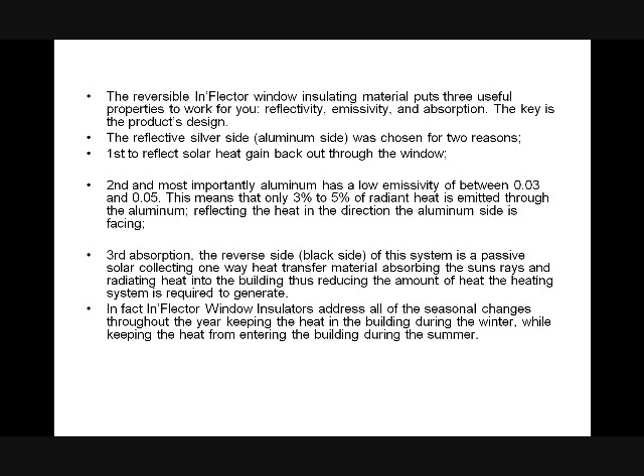It absorbs the sun rays. According to a Texas A&M study, which Dennis is going to explain exactly what a solar loader is, it brings free heat into your home. It doesn't block the heat like window film does—it brings the free heat in. In fact, the In'Flector window insulators address all the seasonal changes throughout the year, keeping the heat in the building during winter while keeping heat from entering the building during summer.

How the In'Flector window barrier insulator works: it is a radiant heat barrier, a see-through radiant heat barrier. Number one, it blocks the radiant heat. Number two, it reflects the solar heat.

In summer, the In'Flector radiant barrier insulators are positioned so the reflective surface faces out, and this rejects 72% of the radiant heat, reflecting the solar gain heat back out through the window. It stops 92% of the damaging UV rays, controls glare, provides daytime privacy, provides cool daylighting with a view, and reduces the load on your AC, therefore extending its life.

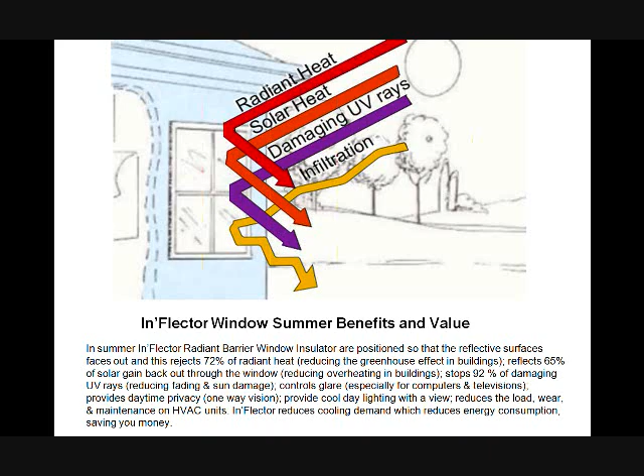And the most important part is it's saving you money. That's what I like best about this product. Not only does it make you comfortable, but it saves you money, and you're saving the earth by it.

Now, heat reflected from a window type after In'Flector window installation: for a single pane window, the percentage of heat coming through is 85%. By installing In'Flector, you decrease it to 17%, an incoming heat reduction of 80%.

For a double pane clear window, the percentage of heat coming through the window is 70%. Decreased by installing In'Flector to 15%, that's a heat reduction of 78.8%.

That is amazing. For a double pane low-E window, the percentage of heat coming through the window is 54%, decreased by installing In'Flector down to 13%—an incoming heat reduction of 75.9%. Now that is what I call a comfort zone, keeping that heat out. That is a true comfort zone.

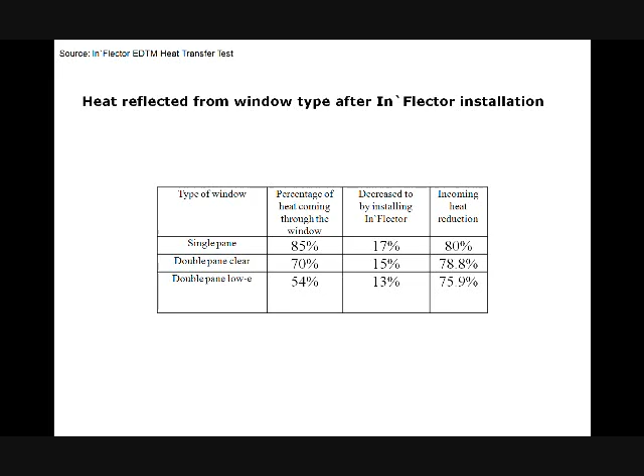So, In'Flector winter benefits and values: in winter, the In'Flector window insulators are reversed so that the silver side faces inward. In this mode, the insulators reflect the thermal heat back into the building, reducing heat loss. Therefore, it magnifies that heat significantly.

It is a passive solar collector—a solar collector, solar rejector. During the summer, it rejects the heat; during the winter, it collects the heat. It's a solar loader—it brings that heat.

According to Texas A&M, by magnifying that heat on a 4x4 window, direct sunlight can produce 2,096 BTUs of heat per hour, which is equivalent to a 600-watt electrical heater, according to the University of Texas A&M.

The damaging UV rays are reflected back outside, and the In'Flector air barrier reduces heated air loss through exfiltration. Again, this reduces the load, wear, and maintenance on HVAC, extending the life of your AC, reducing heating requirements, reducing your costs, and saving you money.

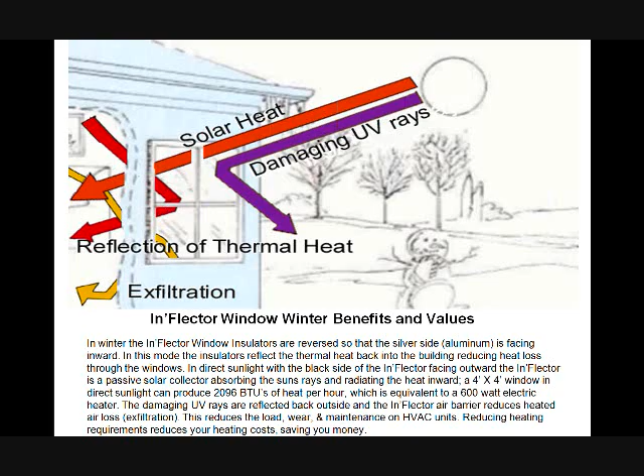If cold is the issue, not only does In'Flector reflect the heat back into the building or magnify the heat, but it also has solar loading absorption and one-way heat transfer.

Heat absorption of plain glass is 6%. Heat absorption of the black side of In'Flector increases to 51%. That's an increase in heat absorption of 750% in relation to plain glass versus In'Flector. I know that to increase comfort in my home, I would want that 750% coming in, not just the 6% that a plain glass window provides.

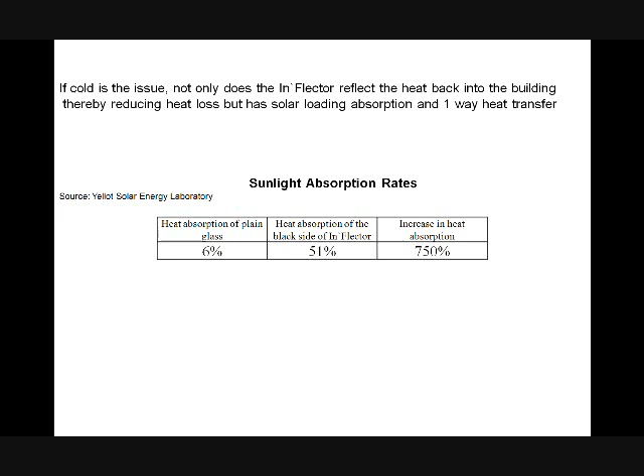In fact, In'Flector window insulators address all the seasonal changes throughout the year, keeping the heat in the building during winter while keeping the heat from entering the building during summer.

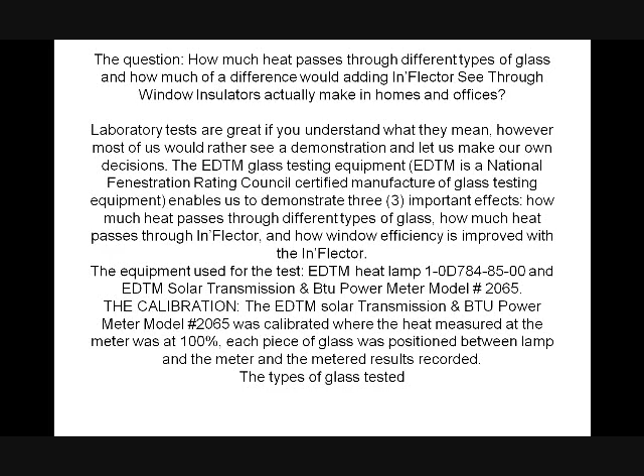So now let's get into the science about some of the things that Keith brought out. Real quickly, we're going to go through an EDTM glass test kit. EDTM makes glass test equipment for the National Fenestration Rating Council, which is the primary body in the world for rating glass products and how they work. What we're going to do is use an EDTM heat lamp, and an EDTM solar transmission BTU power meter to find out how much heat is coming through glass. We're going to take the three primary types of glass: your single pane, your double pane, and your low E.

First, we're going to put the heat lamp on. We're going to calibrate the heat meter, the solar transmission BTU meter, where it's reflective of 100% of the heat from the sun hitting the meter. Then we're going to put the different types of glass in between there.

What we see is that the single pane piece of glass still allows 85% of the heat to pass both ways through the glass. Heat goes to cold, so the heat is coming in during the summer, and going out during the winter. So 85% of that heat can pass through a single pane window. With a double pane, it's 70% of the heat that can pass through, and with a low E window, 61%. People are really amazed to find out that with your low E glass, double pane, you're still having 61% of the heat passing through in either direction. It's not very good insulation.

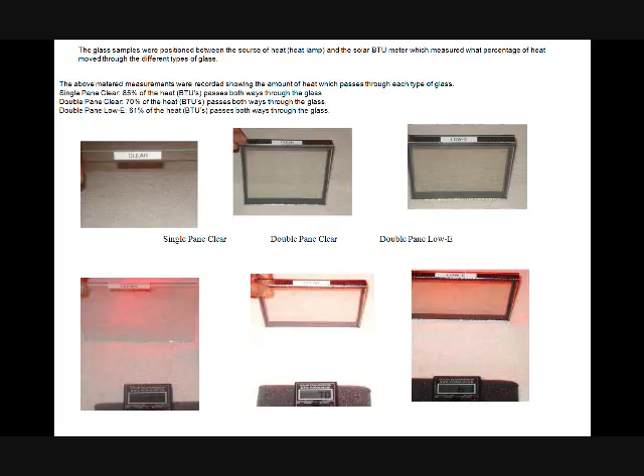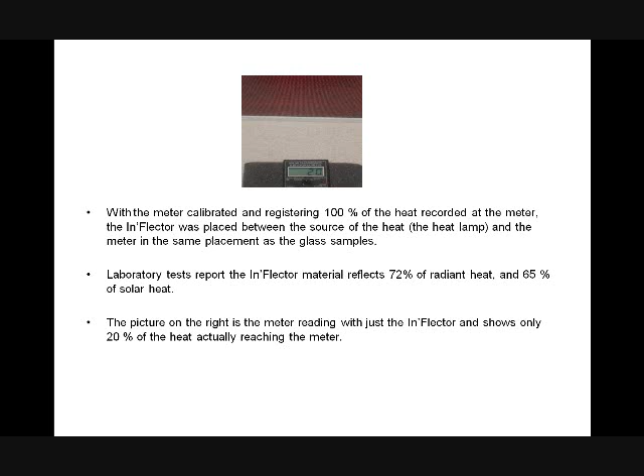Now we put the In'Flector there. In'Flector works with glass, but all by itself, In'Flector reduces that number by 80%. Only 20% of the heat is passing through. But again, In'Flector works with glass, so we're going to see how In'Flector works with the three glass types.

With a single pane piece of glass plus In'Flector, you're dropping down from 85% of the heat passing through to only 17% passing through. The better the window, the lower the amount of heat that passes through. With your double pane piece of glass, it goes from 70% passing through to only 15% passing through. With your double pane low E, it's going from 61% of the heat passing to only 13% passing. So the percentages are going down, and the actual net heat is being reduced because you have better windows.

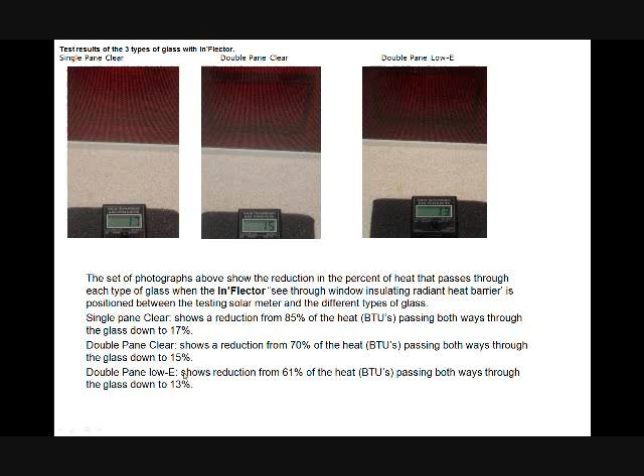So what you clearly see is that with any windows, you're substantially improving the performance by adding your In'Flector window insulators. Let's look at that graphically real quick.

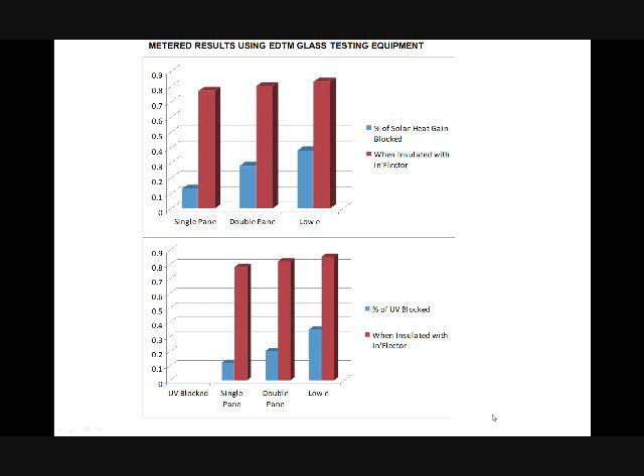This is a little video showing a freezer door. What we've done is we've taken the freezer door out. We've got a piece of glass there, and we've got an In'Flector.

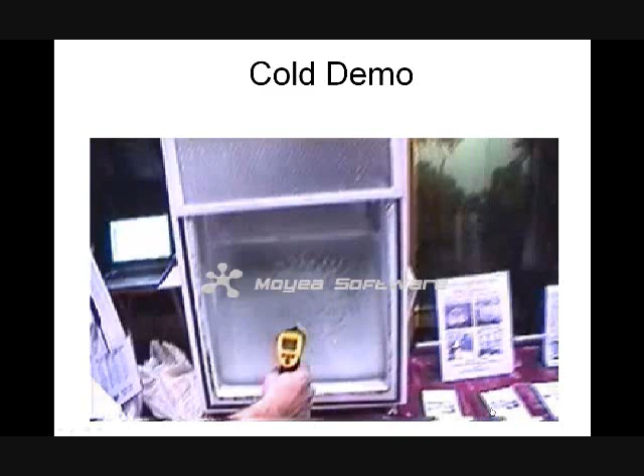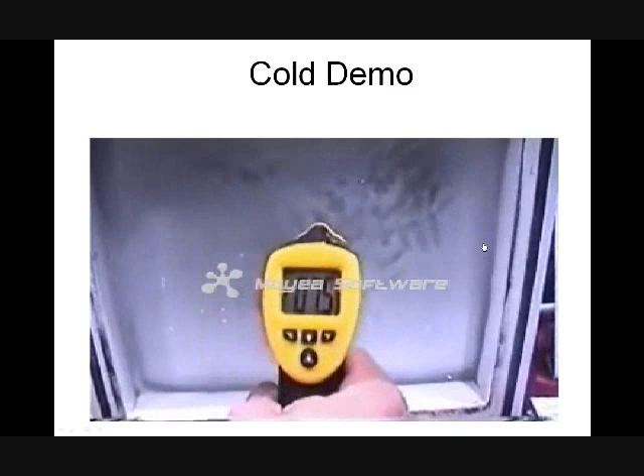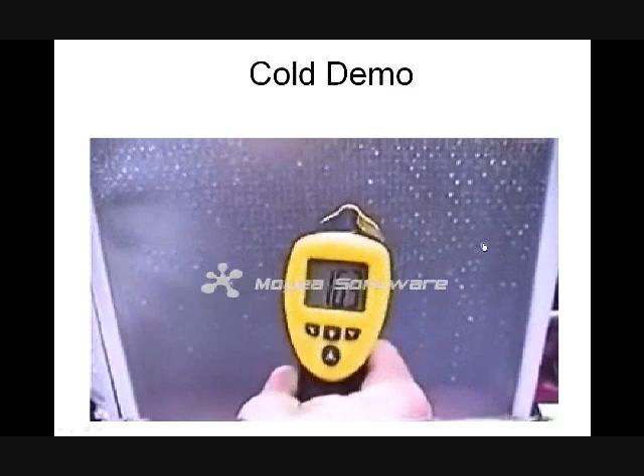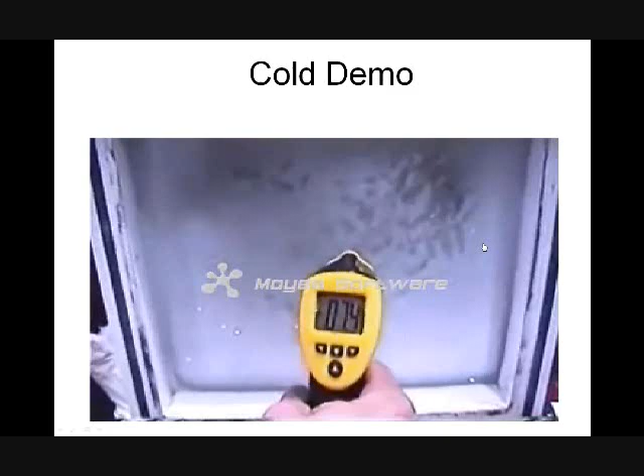So what you're seeing right there, and this unfortunately is in Celsius, you've got -7 degrees Celsius. Now we're going to slowly inject the In'Flector between that. Boom, now we're already positive. We're now at over 16 degrees. From -7 degrees to over 16 degrees simply by adding the In'Flector. So you're putting a barrier between that cold window and the inside. Again, -7 degrees to immediately above 16 degrees with the In'Flector.

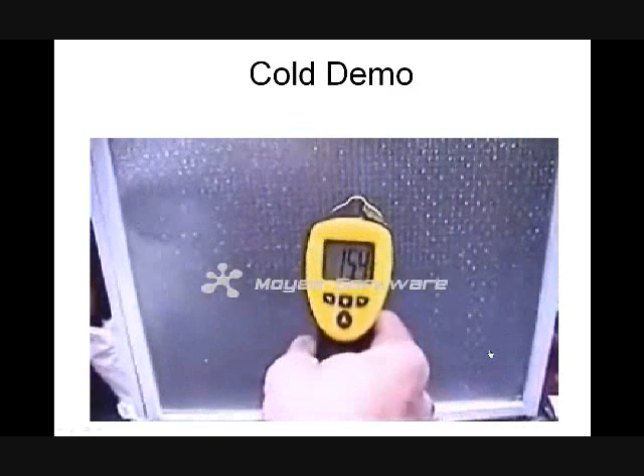This is a heat test.

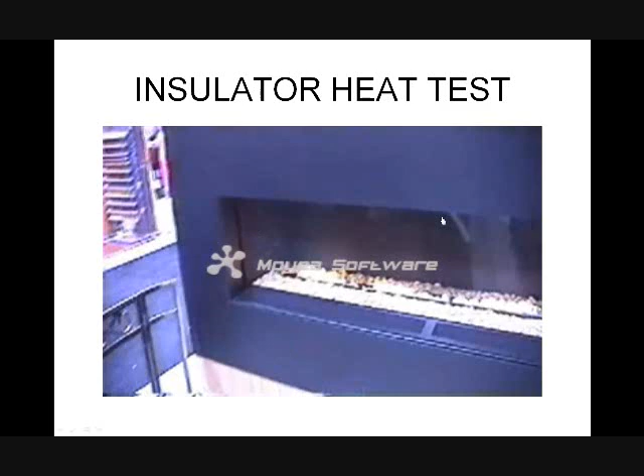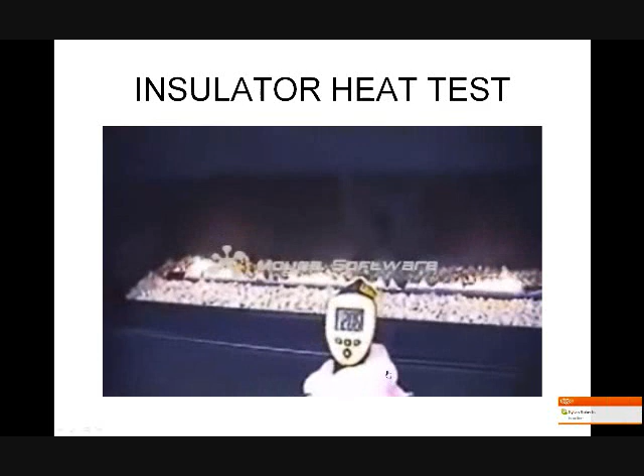Now you're seeing again a temperature sensor. We're aiming it at the fire. What we can see is over 206 degrees. Now we're in Fahrenheit, 260 degrees Fahrenheit.

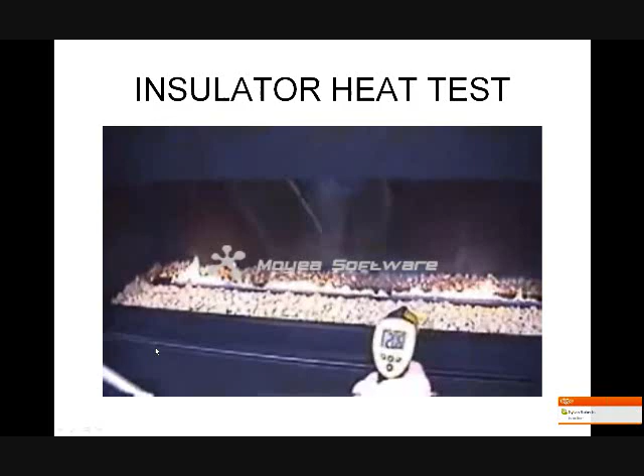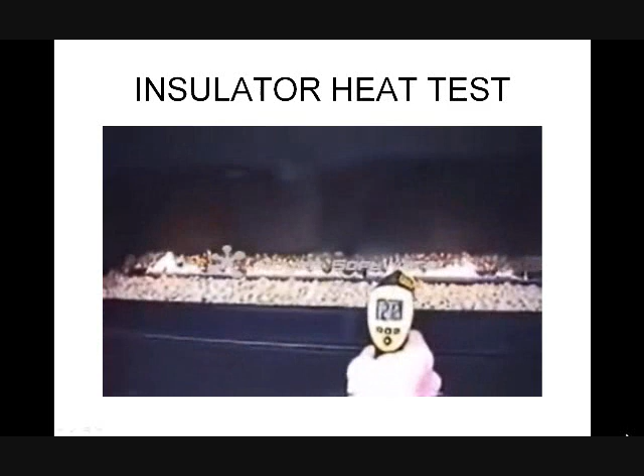Now we'll put the In'Flector in. Boom. How about 150 degrees difference? Heat. In'Flector between the heat and the interior. Massive difference.

What you see right here is a letter from the National Defense Medical Center. There's a third-party test done by the National Defense Center up in Canada. As you see, it's a large building. What they did is they decided that they knew they had a major infiltration problem. They wanted to do two things: see if In'Flector could improve their infiltration problem, and also see what the result was on the people that worked in those offices.

They did their own test through Scanada Consultants. What they found out is that the results were very positive, and remarkable improvements were noted in the air leakage behavior of the windows after installation of the In'Flector. Actually, the results, which we'll show you shortly, were over 70% reduction in infiltration. Then a survey was conducted at the National Defense Medical Center of the staff in the offices with the In'Flector, and the comments were very positive, and the insulators were highly recommended. So again, this was a third-party test on infiltration.

The In'Flector radiant barriers are the world's most complete window insulator. They deal with all the goals of good enveloping, plus they have the benefit of providing free heat and significantly reducing utility consumption, thereby improving air quality.

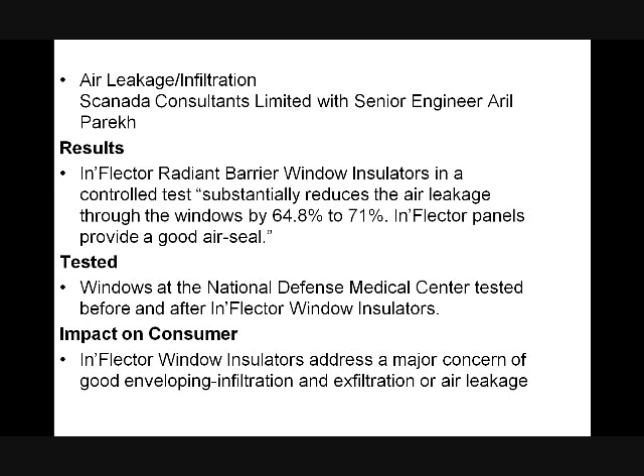Okay, let's go over in depth the test. The first one was the air leakage test, which was the National Defense Center. Substantial reduction, according to the test, of air leakage through the windows, reduced by 64.8% to 71%. Their comment: In'Flector panels provided a good air seal. And again, the people who worked in those offices were very impressed. So the impact is obvious, immediate improvement in the performance of the infiltration and exfiltration for a window.

Yellot Solar Laboratory did the study of the solar loading, and what they found is a 4-foot square window in direct sunlight, pulling in the sun, can have a heat gain of 2,096 BTUs per hour, which is equivalent to a 600-watt electric heater. Now this actually is a double positive effect. So instead of losing heat through your window, now you're gaining heat through your window in winter. So that's very, very important, because now your window can actually provide free heat.

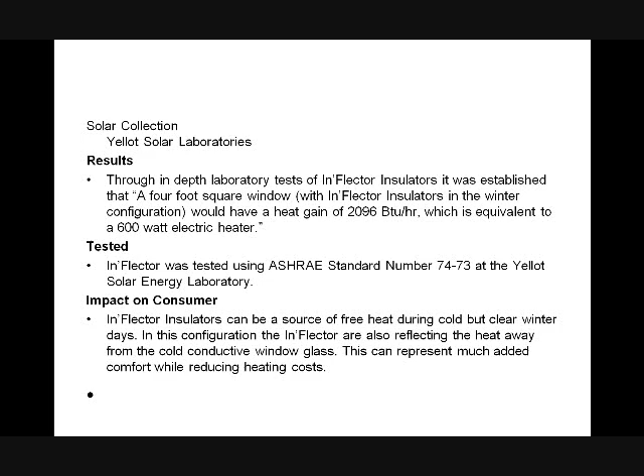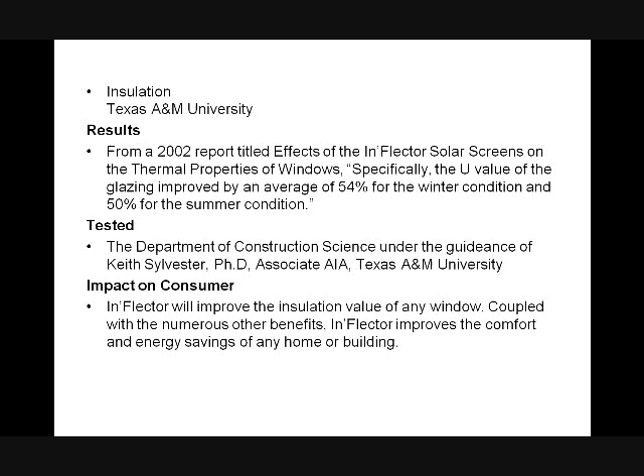Texas A&M did a study on the thermal properties of windows, and they said that the U value of the window was improved by 54% in the winter condition and 50% in the summer condition. This is even without the solar loading, that's just thermal properties, reduction in heat gain, heat loss. So In'Flector will improve the insulation value of any window.

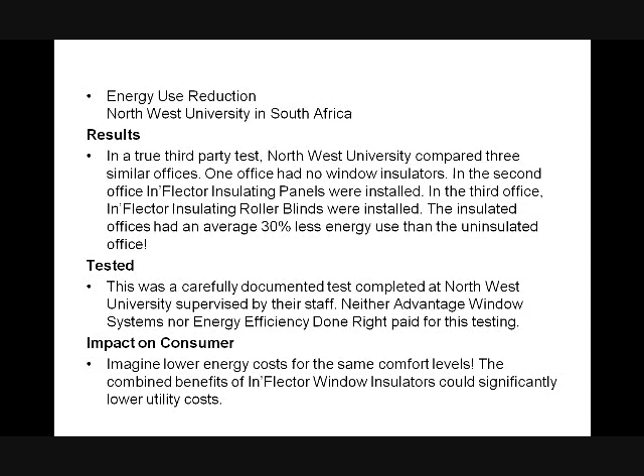Northwest Laboratory and North West University in South Africa did a study, again a third-party test. They took 3 offices to study the energy demand reduction. One office had no window insulators, the next office had In'Flector insulating panels, and the third office had the In'Flector insulating roller shades. The insulated office had an average of 30% less energy use than the uninsulated offices. Again, a true third-party test. So what you can actually have is lower energy costs for the same comfort levels. What a wonderful thing to have.

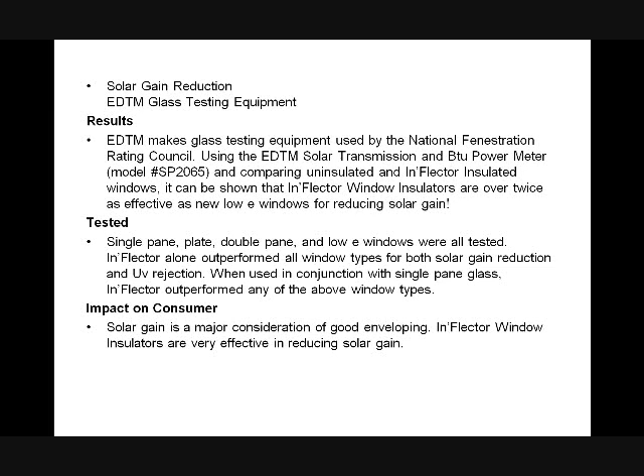The first test you saw was the EDTM glass test kit. What it showed is that In'Flector improved the solar performance of any type of window glass significantly.

Ortec Laboratories did a test on thermal transmittance properties, and what they found is that the In'Flector for solar heat gain coefficients in summer reduced the solar heat gain coefficient by 49%, and at the same time, under nighttime winter thermal conditions, had the effect of reducing the thermal heat loss, thermal transmittance coefficient, by 37%. Dramatic improvements on the performance in summer, dramatic performance improvements in the winter.